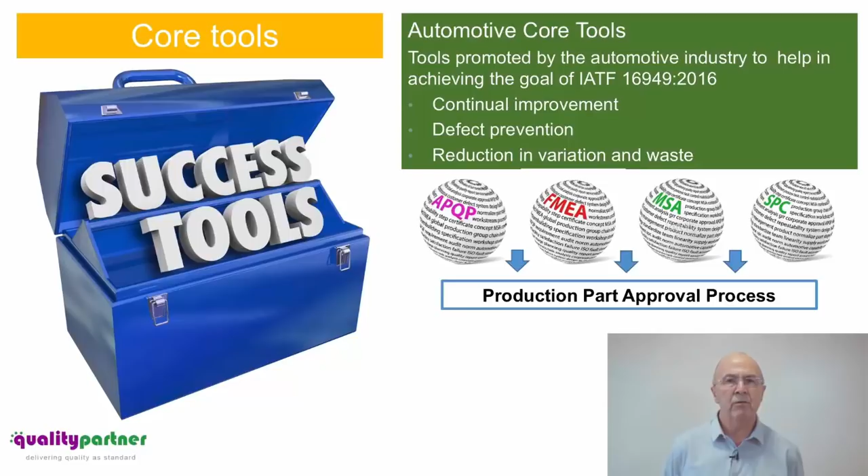The tools that we're going to take a look at today are Advanced Product Quality Planning, which is known as APQP, Failure Mode and Effect Analysis, FMEA, Measurement System Analysis, MSA, and Statistical Process Control, SPC. And these all accumulate into a document called the Production Part Approval Process, which is known as PPAP.

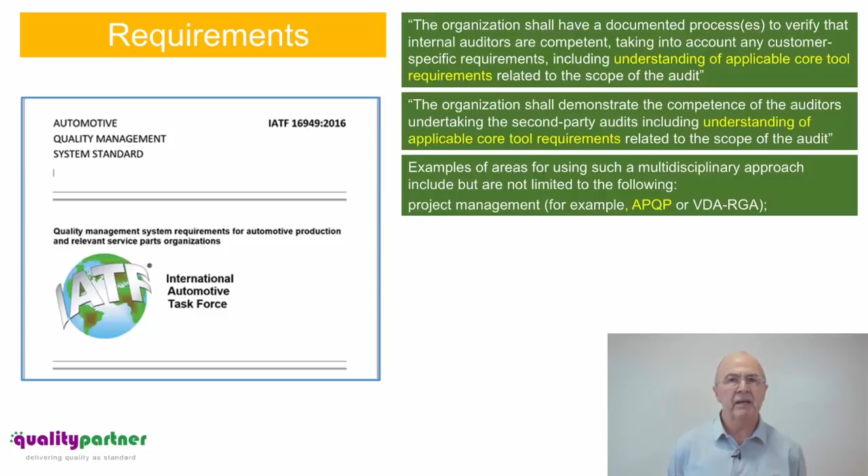Now let's take a look at some of the requirements in the IATF 16949:2016 specification. We will see within the specification there are now clear requirements that internal auditors clearly understand the application of the automotive core tools. And also that same requirement applies to people that are going out to undertake second-party audits. These are audits that are being undertaken of an organization's suppliers.

So now let's take a look at some of the requirements in the automotive specification, IATF 16949. I know some of you watching this video will be internal auditors. Internal auditors now have to demonstrate an understanding of the automotive core tools, because I guess IATF think if they don't, they're not going to be able to undertake effective audits of the processes within their organization.

There is also now a similar requirement that people that are going to go out and audit an organization's suppliers, which in the standard are called second-party auditors, also understand and can apply the automotive core tools.

Now within the framework of IATF 16949, there is no specific requirement to use advanced product quality planning. The standard says that we can use advanced product quality planning when we go about introducing new products, but equally we can use project management. Whichever technique we use, we have to demonstrate that we're using a multidisciplinary approach, and within the team of people that are being used, the team have the necessary competence in the automotive core tools.

We will see within the framework of IATF 16949 that there is a requirement that people understand basic statistical concepts. So anybody within the organization that is collecting data, analyzing data, and using data statistically, they have to demonstrate they have the relevant statistical knowledge to be able to interpret the data effectively.

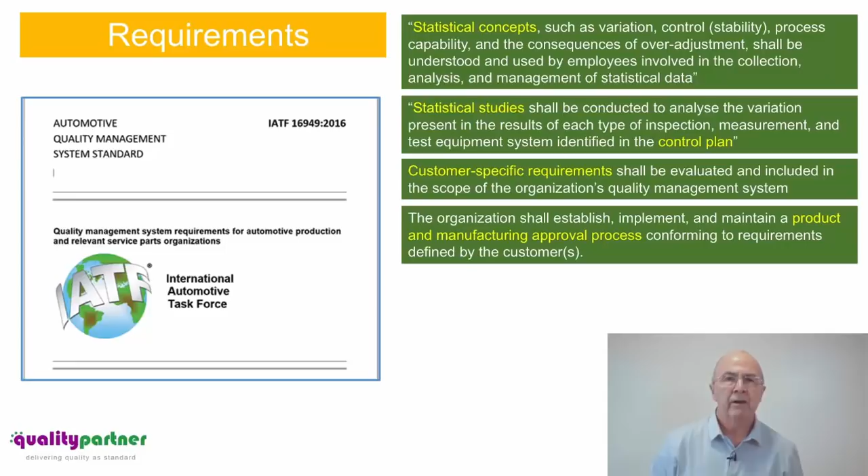In automotive speak, that is called a production part approval process. So now let's take a little bit more of a look at the tools in a bit more detail. The first tool that I want to have a look at is Advanced Product Quality Planning.

I don't want to make this too complicated because I think Advanced Product Quality Planning simply works on a plan, do, check, act cycle. And it is a structured way that we can go about introducing new products and processes within the organization. The first phase of any new product introduction should be to plan and define. So this is making sure that we have a clear understanding about what we're setting out to achieve.

The second phase of Advanced Product Quality Planning is the product and or the process development. This is making sure that we're developing a product that meets the customer requirement and that we're developing a manufacturing process that will meet those customer requirements in a volume manufacturing process. Once we've come up with the product and the process design, we then have to make sure that we validate the design to make sure that it meets the customer requirement.

And the accumulation of that will lead us into the production part approval process. This is where we submit the documentation to the customer to make sure that the product and the associated manufacturing process is capable of meeting those requirements. But Advanced Product Quality Planning does not stop there. It is an ongoing process of continual improvement and also focusing on defect prevention. How can we make processes more likely to produce less defects? What can we do in terms of our continual improvement process?

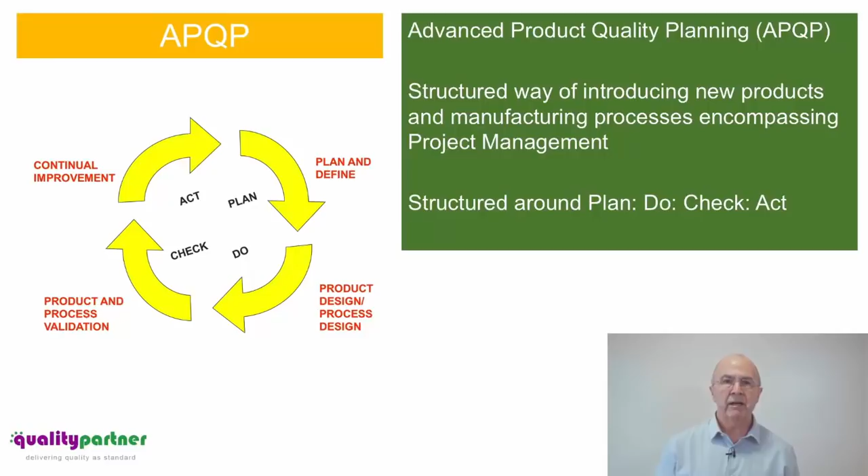So now let's take a look at the tool FMEA. Now we will see within IATF 16949 that there is far more emphasis on understanding the risks within the organization. Now what FMEA does, it looks at the potential risks of things going wrong related to the product design, if we are product design responsible, and it also looks at potential things that could go wrong within the manufacturing process. And from the results of the risk analysis, we do an assessment of risk using 3 key criteria.

We rank risk from a severity point of view, an occurrence point of view, and a detection point of view to give us something called a risk priority number. And obviously the higher the risk priority number, the higher the risk, and this can help us focus on where we need to either modify the product design or the process design to reduce the risk of things going wrong. And in the automotive industry, it's been proven that if FMEA is used correctly, it can actually reduce the risk of product recall and defects being produced while the vehicle is out in the field.

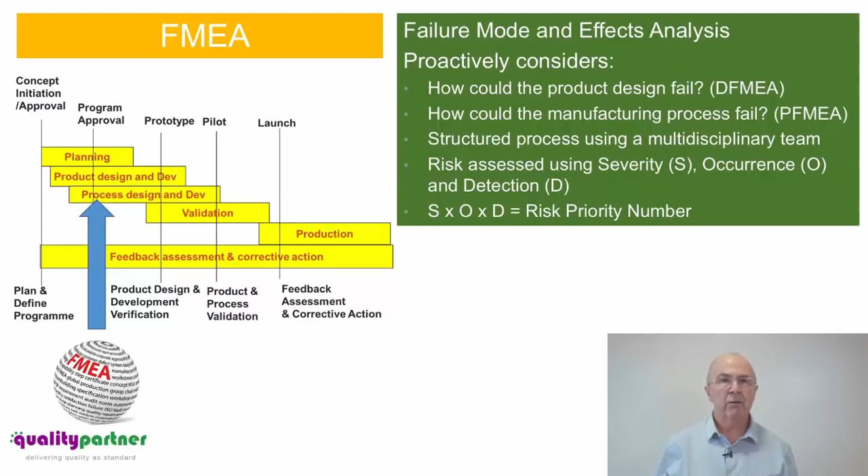So the next thing I want to take a look at is the thing called a control plan. Whereas with failure mode and effect analysis we think about risk, we also think about what are the necessary controls that we need to either put in the measurement of the product within the manufacturing process or how we are actually going to control the manufacturing process. Somehow we need to capture that as an output of the FMEA, and we need a mechanism to capture that and communicate it to people working within the manufacturing process.

The way that's done in the automotive industry is all those controls that are coming from failure mode effect analysis are a direct input into developing this thing called a control plan. Once we develop the control plan, it should then link to the work instructions that are needed to perform each of the specific tasks within the manufacturing process.

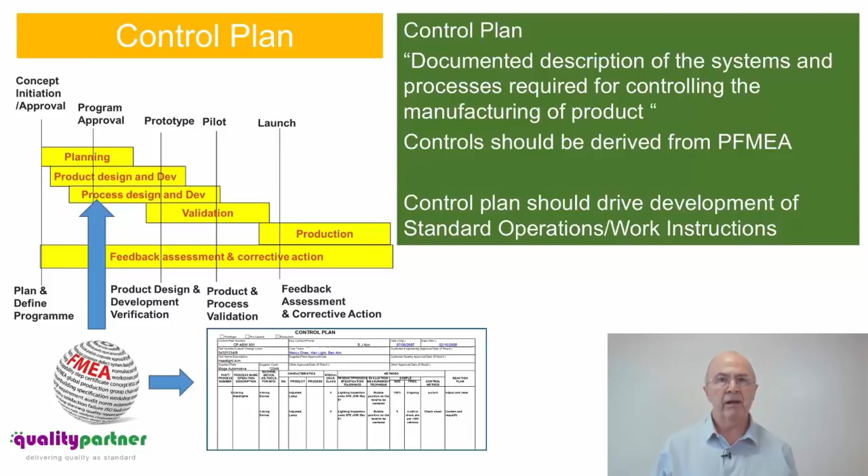So obviously, once we have decided what we need to measure either on the product or within the manufacturing process, we need to make sure that we have the right measuring systems. Now, the first thing we need to make sure is that any equipment that we're using for measurement is calibrated. But in automotive, they say just calibration alone is not enough. What we do need to understand is the variation in the total measurement system. So obviously, the measurement system results that we get can be influenced by the people that are making the measurement.

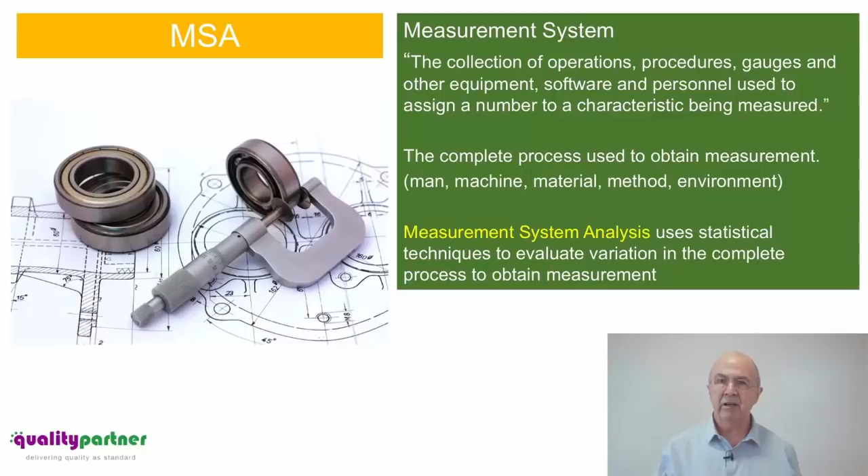They can be influenced by the environment, they can be influenced by the parts that we're measuring, and really in very simple terms what measurement system analysis does is it tries to analyze the variation in a statistical way within the total measurement system. So an example would be if people are using a micrometer, they might not all be using it in exactly the same way. So what we do is a measurement system analysis study to analyze that variation.

So now let's take a look at statistical process control. Now it may be when we go through the risk analysis using the FMEA that we decide, because of the criticality of the parameter that we're going to measure, for instance, it may be a special characteristic that is going to have an impact on the safety of the product we're producing, that we need to proactively understand the variation within the process and be very proactive in taking action if we see any change or drift within the process.

So the tool that we use to actually analyze the output of a process in these cases is statistical process control. And for example, if we visit the shop floor, statistical process control would normally be seen by statistical charts, which would be there to monitor the variation within a process.

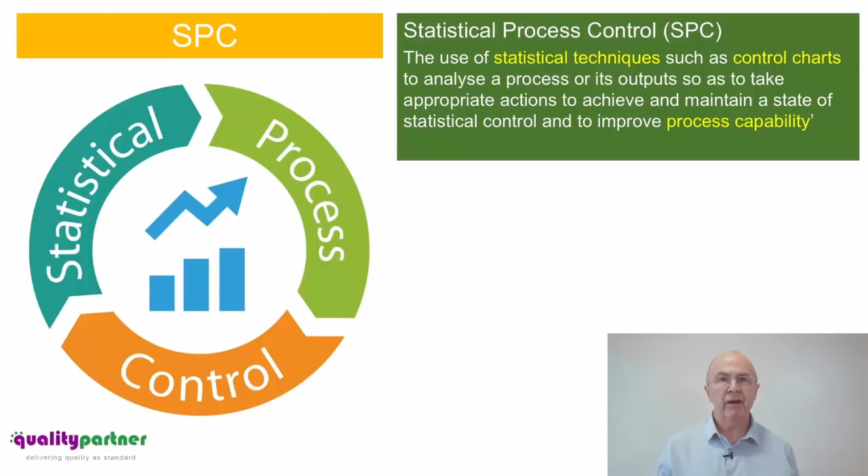So now we have been through the new product introduction process. We have done our product validation, we have done our process validation, we have run the manufacturing process at the required rate. Now what we need to do is to provide the customer evidence that our process is capable to meet their requirements. And the customer requires documented information that that has been done effectively. So the way in automotive that works is the organization will be required to provide information in a structured format to the customer. One of those structured formats is called the production part approval process.

So this is really a format of bringing together all the relevant documentation and information that we have created through the new product introduction process and put it into a structured format. So for example, the production part approval process would include the failure mode and effect analysis, it would include the control plan, it would include measurement system results, and it would also include statistical data, including process capability.

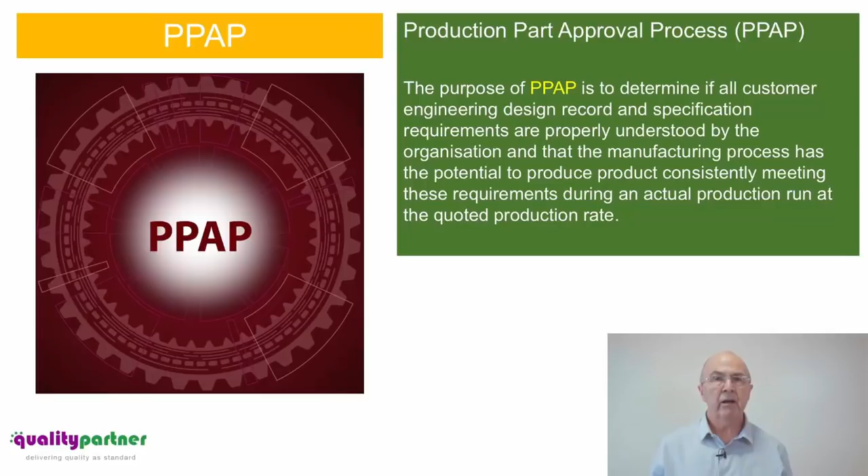So what I've talked about so far is a series of separate automotive core tools. But in practice, that's not the way that it should work. All of these tools should clearly link together. So what we should see is that the design FMEA links into the manufacturing process flowchart. The manufacturing process flowchart should link to the steps in the failure mode and effect analysis.

The output of the failure mode effect analysis should link into the control plan, and then the control plan should show us what measurement systems we're using, where we're using statistical process control, and then there should be a link to the standardized work or the work instructions that are used to directly control the process on the shop floor.

If as part of new product introduction we don't ensure these linkages, one, maybe the new product introduction process is not going to be effective, but two, we are leaving ourselves very open to non-conformities either in internal audits or when the third-party certification body come to audit our organization. So really, this is something that we need to look at within our organizations to make sure that all these tools and techniques fit together, and people that are responsible for the different tools and techniques understand how they should all fit together.